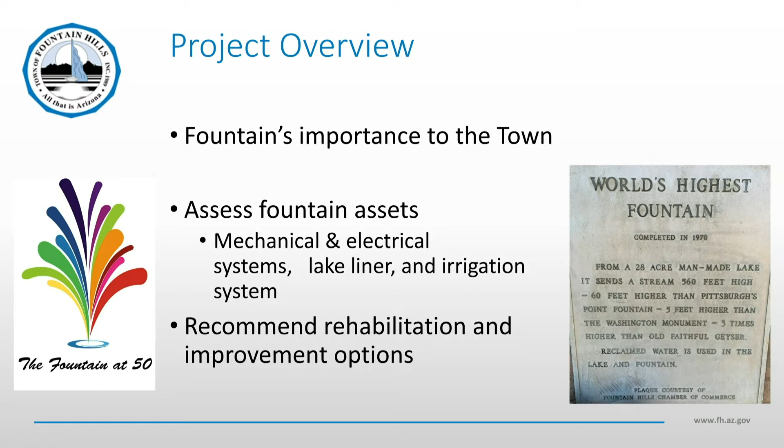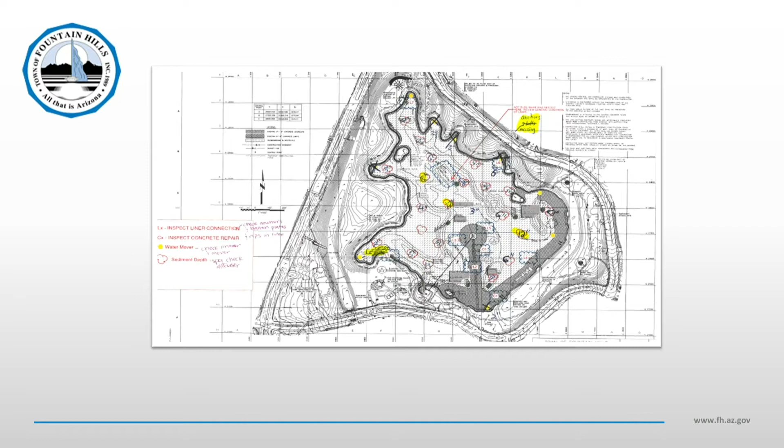So with that overview, we'll go through just some of the components. We'll see some pictures of what we looked at, and then we'll go into a little bit more about the scoring criteria. So certainly you typically don't see a picture like this. This is below the water surface. There's a lot of moving parts and some non-moving parts as well, but ultimately that mechanical equipment to aerate the water so it doesn't go septic, and to move sludge around so that it's not piled up in big areas.

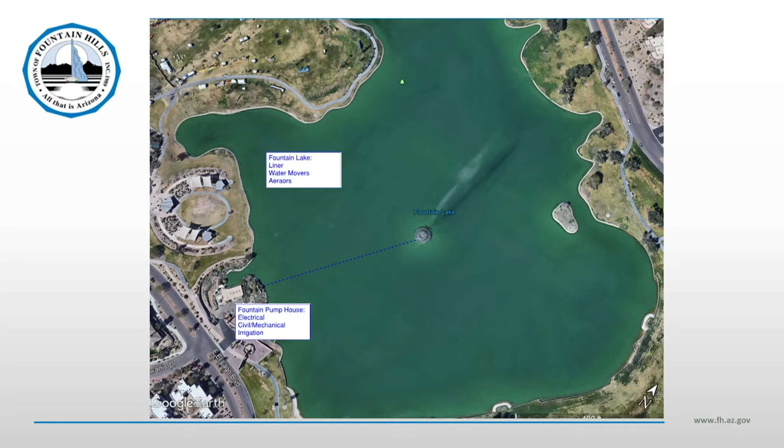Ultimately, there's the liner itself, and then in the pump station, the mechanical room, it's got the electrical equipment, all of the pumps, which you see here. This is one of the 3 large vertical turbine pumps, and the picture to the left is the actual check valve that prevents water from coming back after the water is pumped out.

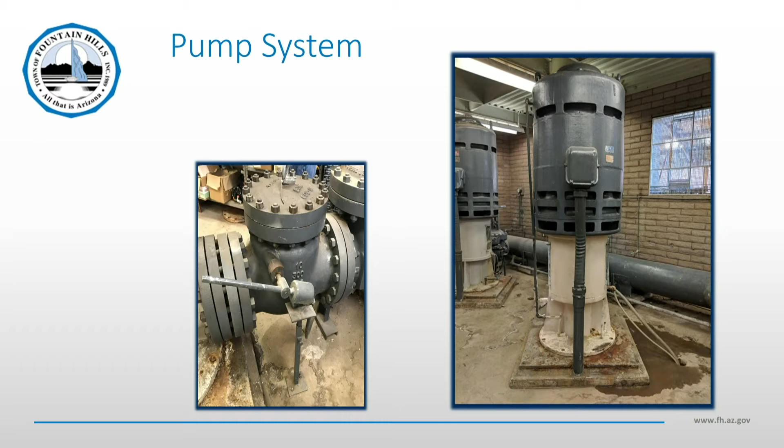The Lily structure itself is actually a lot larger than it looks since it's so far away. There's a nice platform that's out there as well. It's a concrete structure. We looked at the concrete itself; the nozzle itself you can see in the middle of the grating structure on the left. And I know there are some other projects that are ongoing to upgrade the lighting in that area, so we did not include that in our scope.

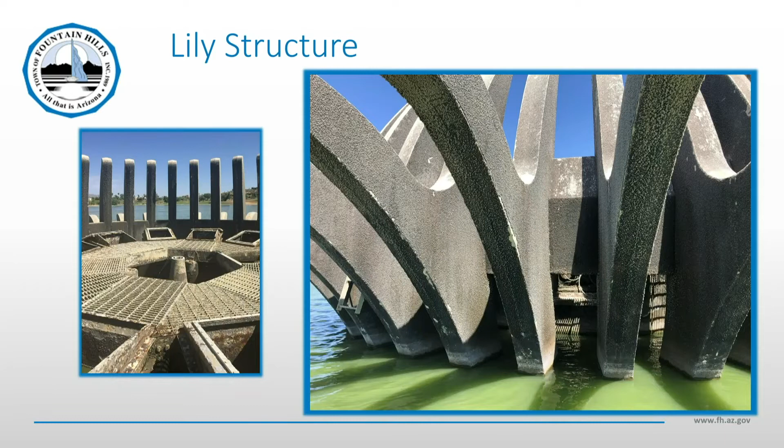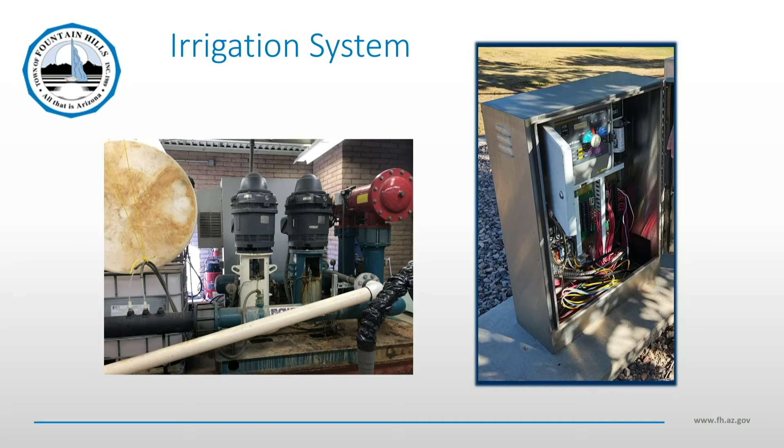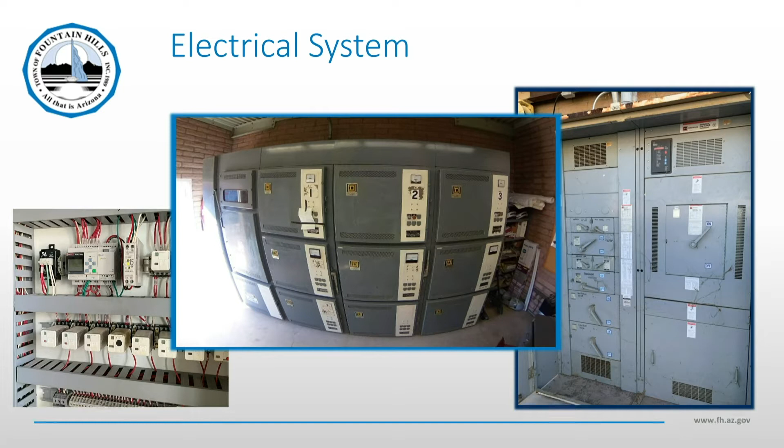That's done separately. The irrigation system itself: within that pump house room, there's a separate skid with the pumps that pull the water right out of the lake and send it to the irrigation system. The irrigation controller is pictured on the right. And then the electrical equipment as well. So there's main motor control in the center. The power that you get from the utility is fed through the one on the right. And then from an instrumentation and control, I&C standpoint, the control panel itself is the small inset picture on the left. So again, all of those things we'll talk through.

But one of the things that we wanted to talk with the team about was, how do you assess those different types of equipment? Those are all different things. How do you rate them? How do you rank them? How do you prioritize them? So what we did is we came up with some assessment criteria and associated weighting factors. And they fall into 2 categories. One is the likelihood that something might actually fail.

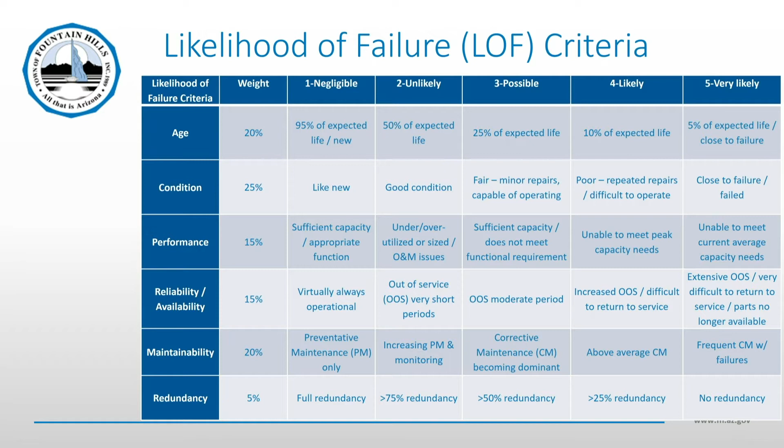So ultimately what we did is for every piece of equipment that we assessed, we used this criteria: how old it is in relation to, say, the manufacturer's typical recommendation for the life of that typical piece of equipment. And so just to give you a quick example, this likelihood of failure score, we took this particular pump. This was one of the irrigation pumps that is on the skid that's in the pump house.

You can see just physically from the picture itself, it's seen better days, right? And in talking to Kevin, that had already been on the list to be replaced. And since we've done this, it has been replaced. So that was already on the list. But this was kind of a snapshot in time. So we could see that we gave it, from an age perspective, a score of 4. So it's more likely to fail than not likely.

It's a fair condition. You can see just from the picture itself, it's not in the best of shape. There is some rusting, but it's not completely gone away, right? It's still usable. Its performance hasn't been able to meet what it was designed to do. And then the reliability and the maintainability both were scores of 3, right in the middle.

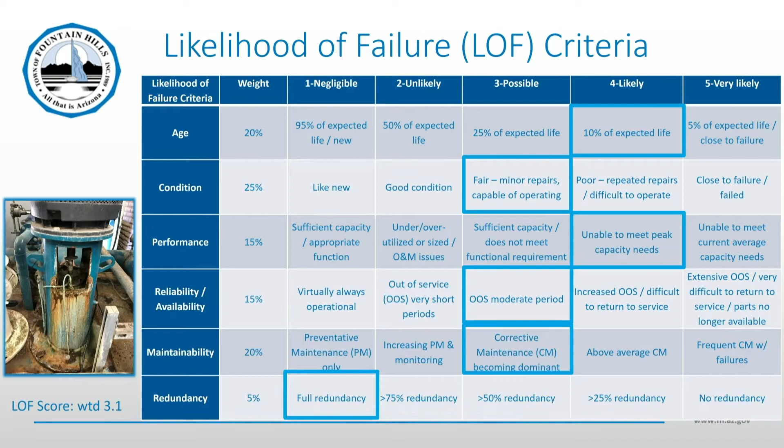But because there is another pump that's there that is fully redundant, it actually had a negligible score from that standpoint. So if you take all of those things and multiply them all together, you get a likelihood of failure score of just over 3.1. And the other criteria that we weighted against is what's the consequence of it failing? So it's not just, is it going to fail, but what happens if it does? So again, similar type of thing, we identified these.

Yes, please. Sorry. Did you assess how long it might take before it fails? So to answer your question, council member, how long some of this equipment might take to fail, that's kind of baked into the scoring. So the higher it is on the scale, the more quickly it would actually fail.

I should say that this picture that we showed is probably the extreme example of something that was close to failure. Everything else that we saw out there, while its age might be beyond the manufacturer's recommendation for a typical piece of equipment, there was nothing that showed imminent failure, if that makes sense. So from that standpoint, we didn't necessarily pinpoint this has 2.6 years until failure. That was my next question. Okay.

Sure. So from a consequence of failure standpoint, again, we came up with these 5 major categories. What's the impact to the environment? Safety and security, both for town personnel as well as the public. What's its impact financially? Does it have any regulatory compliance impact? And the biggest weighting factor that you'll see there is what's the impact to society or to your community? And again, 1 being the best score, 5 being the lowest.

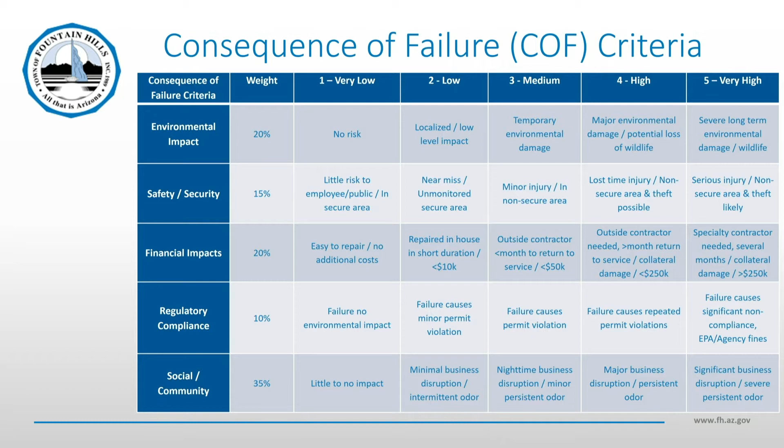And again, looking at that pump in particular, it had a medium impact from an environmental standpoint, so it was given a 3. From a risk of safety to the public, it was given a low risk, so it was a 1. Its financial impact, yes, there is some impact. It might require an outside contractor to help replace that, or is it less than a $50,000 cost? And then from a regulatory compliance, if that pump failed, you still have another redundant pump, and it wouldn't impact the environment if it did.

And then ultimately, though, it did have a higher score of 4 from an impact to society. So if there were multiple failures and it wasn't able to deliver water to the irrigation system and to the turf, then ultimately that would have a negative impact to the community.

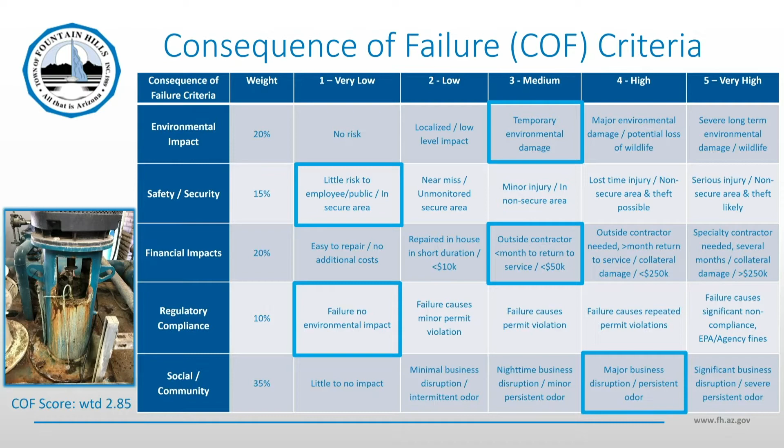Mayor. I have a question. Oops, sorry, go ahead. Yes, please. I was going to ask you, the weighting, the social community weight is higher than the safety security. Is that because safety security is going to get the attention anyway, or how did that weighting get figured out? Good question, Mayor. What we felt was most of the equipment is either submerged in the lake or behind a secure environment. So from that standpoint and talking to the team, more importance was placed on the impact to the general public.

Thanks, because it's more controlled. I mean, who's going in, they can evaluate what they're doing, rather than if it was out in the public somewhere. That's correct. Thank you. Councilman?

If equipment has, you think, a 2-year life, let's say, did you look at all at whether or not you can repair them rather than replace them? Yes, we did. You'll see in some of the later slides, from a recommendation standpoint, if it had the ability to be refurbished, that was the recommendation. If it was beyond or nearing the end of its life, then replacement, if that made more sense. And we have a couple examples of that.

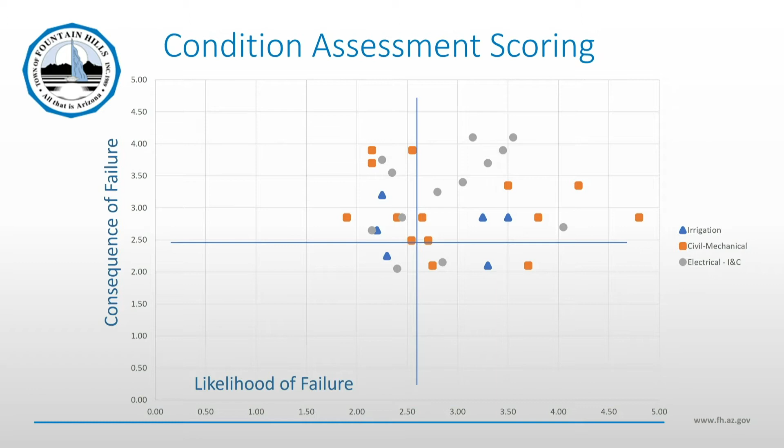So with that, are there any questions? I know this is charts and graphs and lots of things, but any specific questions about those? So each one of those represents a specific thing that you have in your report? Correct. Each one is a specific piece of equipment. So we'll talk a little bit more about specifics, not every single one, because there's a lot of dots up there, but we'll talk first about the civil mechanical system. I'll turn that over to my colleague, John.

Thank you, Mike. John Corbin with Black & Veatch. I was assisting Mike in the role of engineering manager. Very pleased to be here and not stuck in my office as usual.

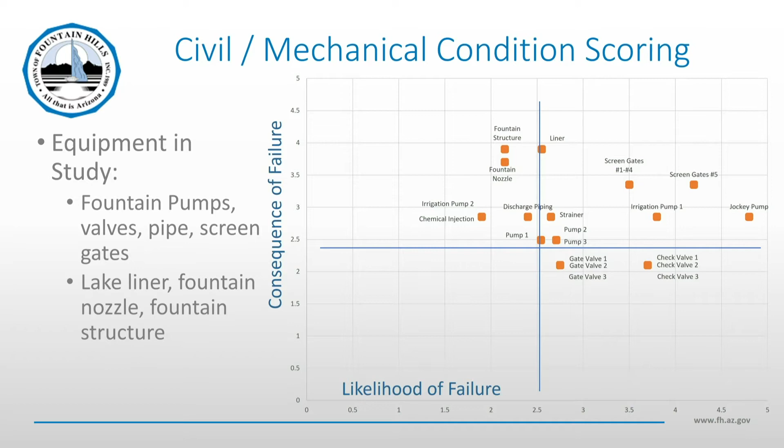So as Mike was relaying, we want to start by talking about the nuts and bolts, mechanical stuff. That's my area of expertise. As he went through in the introductory slides, we took a look at all of the equipment at the pump house and the major components there. We took a look at the lake liner and the fountain lily structure, and even the pipeline between the pump house and the fountain. We're not going to get into the nitty-gritty of every component, but we'll touch on the major assets here.

So let's start with the lake liner, because I think that's of greatest interest to many folks. As Mike mentioned, we sent divers down to take a visual, firsthand inspection of the HDPE plastic liner that was installed 20 years ago. We also had them look at where the liner meets the concrete that surrounds the lake, represented by this photo here. This is back in 2000 when we installed the liner. And furthermore, we had them take a look at the subsurface intake to the pumps at the pump house.

So let's talk a little bit about what's going on here. The liner is a plastic HDPE liner, and it's fastened to the concrete with stainless steel batten bars and these anchors. And we identified for the divers certain locations around the lake that we wanted them to examine the connection. And the feedback we got was all of the connections were in very good condition.

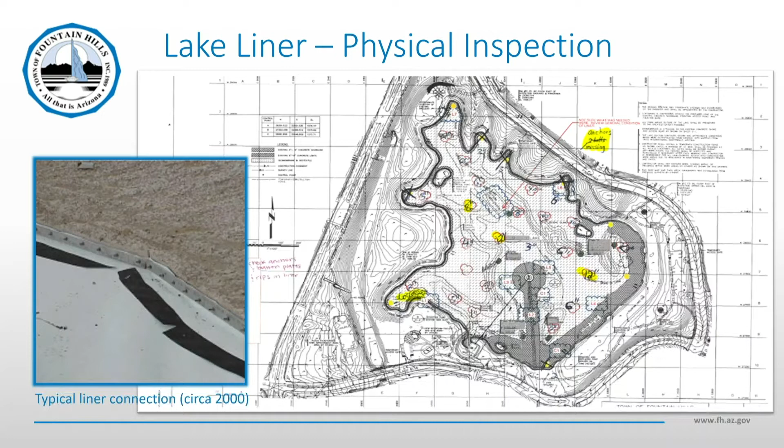And that goes for the liner condition itself. So they went out to the middle of the lake at certain spots that we identified and took a look at the liner condition. There were no tears that they observed. There's no folds, creases. Overall, very positive view of the condition.

But we'd always planned to go a step further and do an evaporation test on the lake as a whole, because we can't expect the divers to inspect every single square foot of that liner. It would be very easy to miss some damage. But by doing this evaporation test, we measure the loss of the lake over a period of time and compare it with the loss of a controlled evaporation pan. And there's a little bit of a conversion factor in there because you got a small body of water next to a large body of water, and they're not one-to-one, but there are accepted practices for doing that.

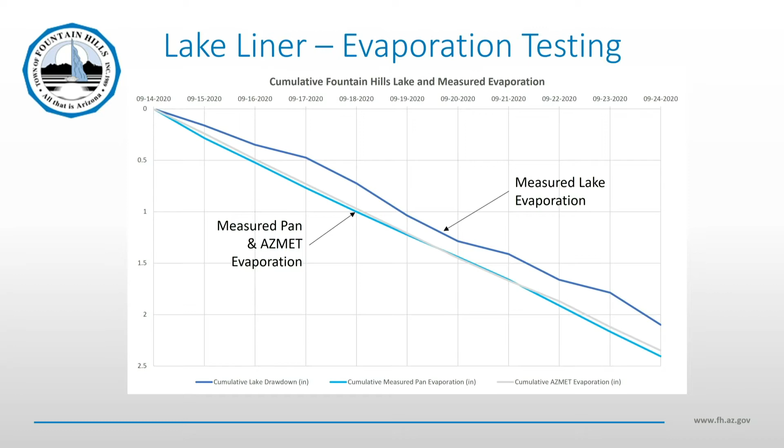How much, in gallons, would there be? Do you know? Over the course of the test period, how many gallons did we lose? I do not know that off the top of my head, and I can't compute that off the top of my head. Just curious. Sanitary district probably knows. Oh, yeah, but no, she was asking gallons. I don't know how many gallons. Per inch. Yeah. Come on. Thank you. No problem.

So as I mentioned, we also sent the divers over to the intakes that are beneath the pump house. And we had already known that there was some concern about the screens. The area under the pump house should be screened off to keep large debris out of the pumps. But since one of the pumps had recently sucked up a large fish and had to be fully dismantled to remove those fish parts, we knew something was awry. And what they found was one of the 5 screens was completely bent back into the intake area. So effectively, there was no screening.

It's not difficult to understand. We would recommend that get repaired right away, and we're actually working with the divers right now to come up with an approach for that repair.

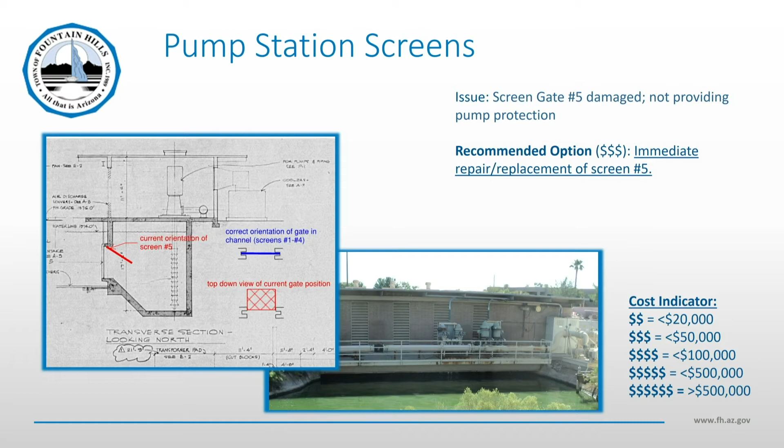So above waterline, we took a boat out to the lily structure. And yeah, the lily structure is covered with organic and inorganic material. It doesn't look pretty when you're up there close, but we could find no evidence of major structural faults with the concrete. There's some spalling in areas that I'm pretty certain were locations for the original anchor bolts when they hoisted that thing into place. But that's not a terrible concern of mine. Like Mike mentioned, the lighting was in poor shape, but we already knew that.

So our recommendation is just to continue to monitor and spot repair as needed. But furthermore, when it does come to a time in the future when the liner gets replaced, and that will happen someday, we would really recommend that an intensive cleaning of the structure would be warranted to get a more in-depth structural review of the concrete that right now is just kind of covered in muck.

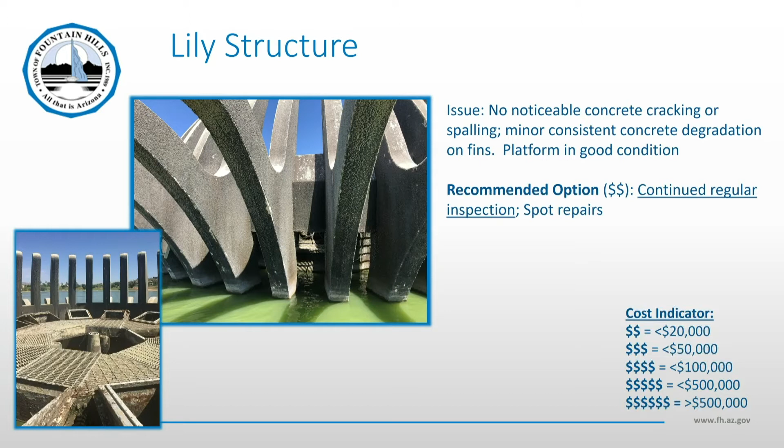Oh, here's those anchor bolt locations I was mentioning. So really, they're just tiny little divots in the concrete.

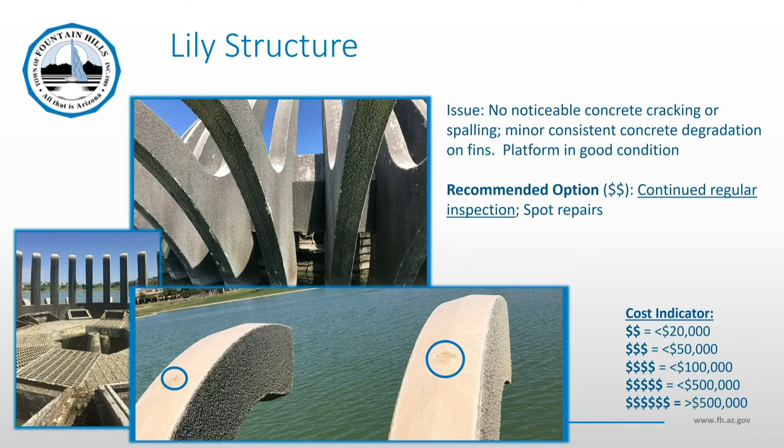So let's talk about another big one, the fountain pumps. When we initially entered the pump house to start our mechanical assessments, it was pretty apparent they needed some work. They needed some love and attention. But we weren't ready to say scrap them. We already knew that one of the pumps had been removed and was at a shop for rehabilitation. And that was great timing for us because then we could see the level of rehabilitation that was being done.

We went to the shop and talked with that shop to discuss what are you doing to the pumps, how are you doing it? And we were very pleased. You can see here, yeah, it's pretty looking, but more than that, this rehabbed pump has, to our satisfaction, been rehabilitated to the level it needs to be.

So we're comfortable with a recommendation of continue this same course of maintenance, and we don't feel that these just need to be scrapped and replaced anytime soon. You should get more years of life out of them with what you're doing. Yes.

Yeah, if you did total replacement. We rebuilt the motor when we did. Well, it's less than a half, but greater than 100. Oh, okay. Yeah, for all three. For all three? Right, okay. For all three, not each. Okay, thank you.

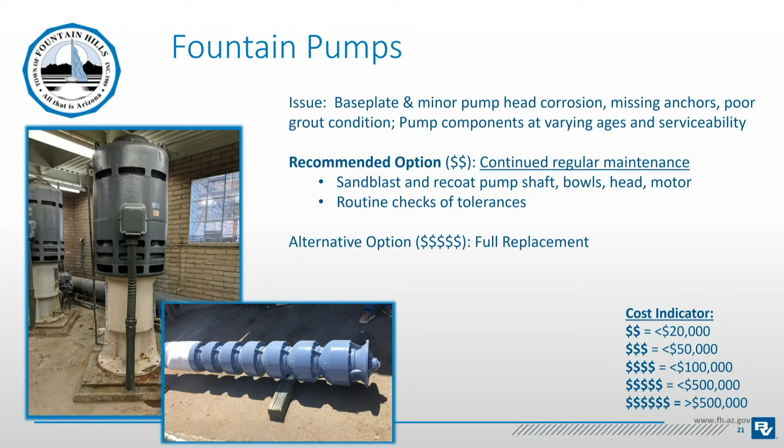So here is another sore spot that some of you may have been hearing things about. The check valves on the discharge of these pumps are there to protect the pump. If you have pump 1 offline and pumps 2 or 3 are operating, you don't want water backflowing down your pump. That's really their main purpose. Other than just a simple replace it recommendation, we wanted to understand why are these check valves failing after only 3 years? Because I know that's been a question on everybody's mind.

So we were able to actually open one up and take a look at the guts. We observed material loss, both in the closed direction and the open direction. So there's a lot of banging going on inside of there. And the progressive material loss is why it will stick open. And this has been a real headache for the operations staff.

Unfortunately, with the system, if one of these sticks open, the position switch on the exterior of the valve will fail to close. And what it does is just shut the entire pump station down. So instead of just affecting the one pump and the one valve, now your fountain's not running at all until Kevin goes out and basically jiggles the handle, just like you do on your toilet at home, to get it to seat. And it's not convenient, as you might expect. So, yeah, that's right, the jiggle the handle job.

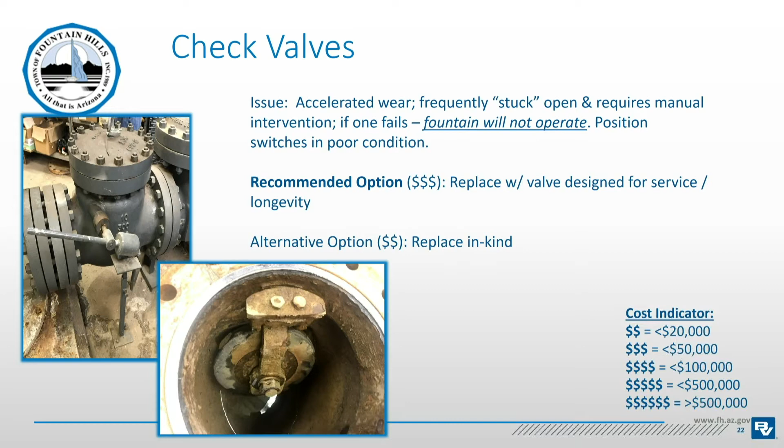So that's why we're stepping back and saying, you really need a valve that's had some thought put into it. And this is going to be more than your commodity off-the-shelf check valve that you could use in a lower pressure environment. It's going to have a little bit of a cost impact because it's going to be a higher pressure-rated valve.

Thank you, Mayor. So 3 years ago, Kevin or Rachel, when we replaced that, who told us to put that valve in there, and why are they not responsible for giving us bad information? Well, sorry, John. We may be stepping over, this is our next item, but to clarify, it was 5 to 6 years ago. They started about 3 years ago. We were replacing them, we didn't do them all at one time. We did them individually, one after another in successive years, because we couldn't absorb the cost.

My guess is, and I wasn't in the director role at the time when this started, but my best guess is that we worked with our vendor, an electrical vendor that works on our pumps and our systems regularly. We said, hey, we're having issues with our previous valves, which is the one up there on the left. It's sticking all the time, we're using a lot of clean water, we're having multiple problems, we need to replace it. They said, okay, we think this is the best situation.

We did not have an engineer involved at that point. My best guess would be that we went with the recommendation of the service provider, and there was a disconnect as to exactly how much pressure and how much volume moves through those pumps. So that would be my best guess. So we asked an electrician a plumbing problem question. Maybe. Good way to put it.

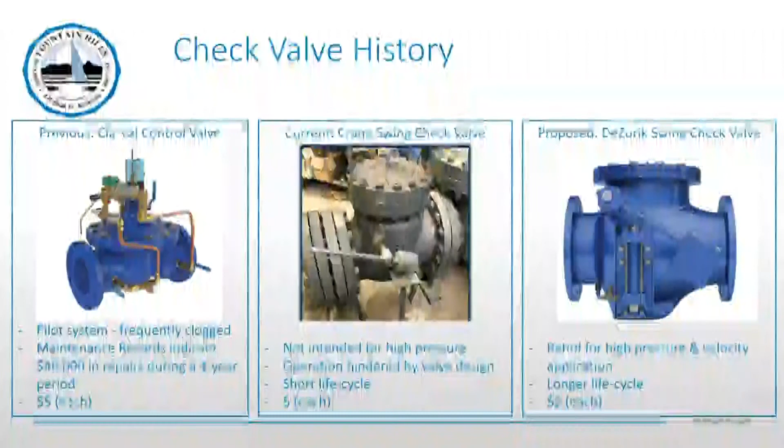So I think you stole my thunder on this slide, but I'll go through it anyway. As we were talking about, this was the previous style valve, generally just called a diaphragm control valve. Cla-Val is a brand, but this style of valve can be had from other suppliers. It's frequently used by municipal water suppliers to control pressure in their distribution systems, and it can be used on the discharge of a pump for pressure control. But what's key is that it have a clear water supply.

You can see from the little picture, you've got a lot of little tubes and appurtenances stuck on top of this thing. It doesn't do well with dirty water. But it sounded as if when these were installed, they did have a separate clear water supply. Regardless, it sounded to be a maintenance issue, repeated clogging issues. It wasn't a good fit. And frankly, if we were starting with a blank page design, this kind of valve we would never be suggesting. So it's curious that it was used, but we wanted to dispel any thoughts that it worked really well, so why don't we go back to it?

Mayor? Excuse me, I'm sorry. Yes. We have a lot of salt in the water. How might that affect any of this equipment? You know, these are lined appropriately, coated.

So let's jump from what was to what is right now. It was replaced with a swing check valve, and like I had mentioned, that doesn't necessarily mean all swing check valves are a terrible application for this. It just happened to be that this really wasn't rated for the job. So what we're proposing looks an awful lot like what you've got, but all the internals are rated for a 300 PSI operating condition. And we're going so far as to also suggest things like an integrated damper.

So think of it kind of like the shocks on your car. It kind of helps to control movement. This would help to control violent swings internally that could damage the inside of the valve. And this is integral to the valve. Also, we'd be providing a position switch that was integral to the valve. If you take a look at what has been done here on the existing valves, the position switch was kind of an afterthought, and it hasn't worked terribly well. It's just kind of sitting there on a little post. So we would move away from that kind of an installation.

So, to kind of reiterate what you had just mentioned, yes, there might be a little bit of economic impact, some soreness there, but you're going to get a heck of a lot longer run out of this, and it's the right application.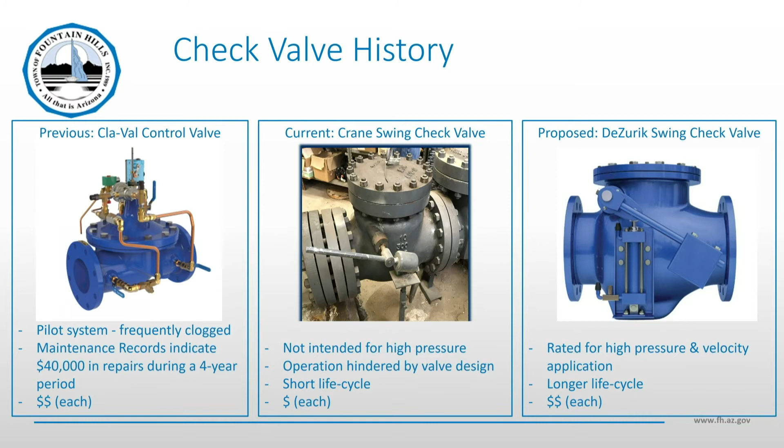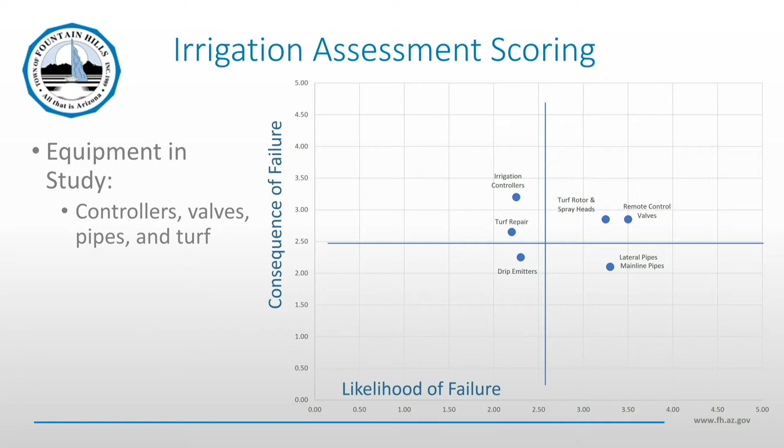So I will just do my best to give you the overview of the irrigation system that J2 assessed. When I take a look at this graphical summary of the assessment, each individual item may look like, well, gee, most of it's in fairly decent shape. But I think what we want to do is bring your attention to the system as a whole that needs to be evaluated maybe in a little different vein from just looking at the piece parts here.

So we've been told that one of the biggest sources of complaints that we're going to get is from the public perception of the turf quality and the irrigation. Morning and afternoon walkers around the lake don't want to be hit with irrigation spray, and they're going to say, why can't you do this some other time? And if there's rough spots, they're going to complain about that too. So irrigation becomes kind of a higher priority item than you would think. And that was kind of covered in our consequence of failure discussion earlier. Did you have a question?

I do. Back to the salt. Yes. The salt is just ruining all the grass. Is there anything mechanical that can be done to reduce it? Well, Kevin's done a great job in honing in on chemical treatment, and that is going to be your best option because mechanically, well, how do we remove the salt in our homes? By an RO system. And what we do in our homes is we actually take that concentrated salt and flush it down the drain. On a large scale like this for the lake, what are you going to do with that salt is a big problem.

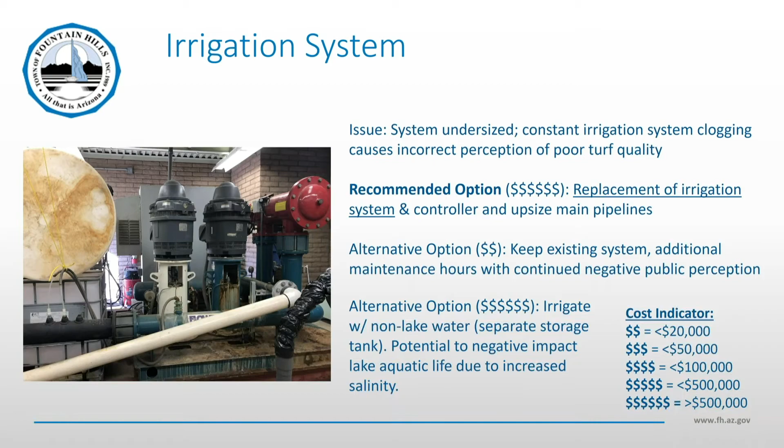And this is all in conjunction with the fact that it's become a maintenance nightmare because they're regularly out there cleaning irrigation heads because they're clogging. I think the system's so old that it's got a whole lot of material buildup inside. Stuff that they're not necessarily seeing at the pump house, but they know ends up reducing the range that their sprinkler systems will shoot, because things are clogging up. So there's a lot of those factors to consider.

And so as a whole, our recommendation is a pretty sizable upgrade to the irrigation system. Controllers to better offer more flexibility, main size increases, and pump size increases. Now, the good news is, of course, you don't have to spend all of that money in one fiscal year. You can have a replacement budget on an annual basis, but one thing to note with that approach would be you may not be getting all the benefit that you're looking for when you piecemeal it out until everything's in place.

I have a question about the option about using the non-lake water. Yes. That wouldn't solve this issue necessarily, right? Yeah, unfortunately, it creates other issues, I should say. So yeah, I wanted to briefly touch on that. So we had talked with the sanitary district about this idea of, let's look at taking water directly from your AWT site, your advanced water treatment facility that's just down the street. And don't put that water in the lake, but rather direct feed it to your irrigation pump system. And that would solve a lot of your irrigation quality problems.

And we looked at multiple things associated with it, not only the capital associated with purchasing new VFDs and installing them, which kind of has a domino effect on some of the existing electrical equipment that's there, but also on just the timing of when a variable frequency drive would be used by these pumps. So typically, right now, if the wind was nice and calm, the pumps would turn on and even if they had a VFD, they would ramp up to 100% speed and they would stay there for the time that they were on and they would just turn off.

The only time that a variable frequency drive would be desired would be to try to match the speed of the pump to the wind speed of the actual environment to prevent drift of the fountain. So when you consider that these pumps run 3 hours a day total, and that most of the time they're operating at 100% speed anyway, whether it's one pump or two pumps, depending on the wind speed, and then you throw in the fact that they're pretty intensive capital-wise to install.

The equipment where you would need to put them inside, because they need to be installed inside, you'd have to take the existing electrical equipment and buy a new one and put it outside, and then do all the cable and conduits, and then upgrade the HVAC system in the room, because there's additional heat that's generated by those. So there's just a lot of extra things. And when you do the payback period on that, it just doesn't pencil out. So we don't recommend putting in VFDs on these pumps.

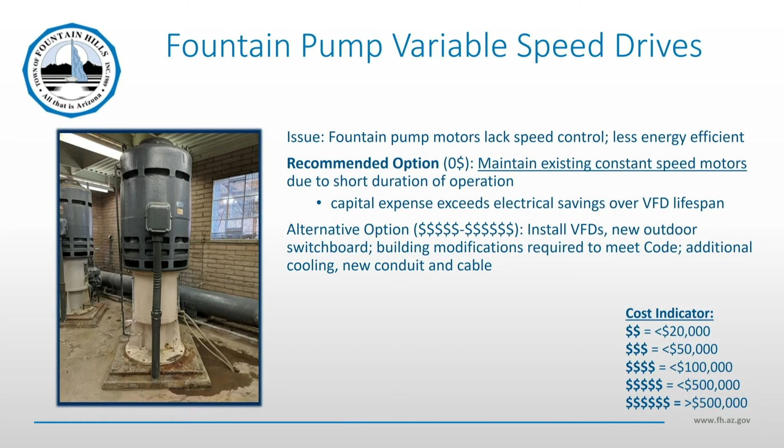And if for whatever reason you did change the duration that those pumps run, then that might be something to look at again. But even then, I still think it would be difficult to get that payback period just for the typical lifespan of a VFD themselves. So with that, that's a zero cost option that is nice. So I think a more economical way of being able to help from a control standpoint would be to look at how the control system of the fountain system is being done right now. And you see that inside this control panel is just a little controller there, and it's pretty basic.

It works, it runs, but it doesn't really communicate to the outside world. So in order for Kevin and his team to understand what's happening, you have to physically go over there to see what the problem is.

So our recommendation would be to spend some money to replace this basic system with a programmable logic controller, a PLC, which would be able to provide Kevin and his team, from an operations standpoint, real-time information about the status of the pumps when they're operating, the status of the check valves when that switch has been made or not made.

And if you also add a cellular link to provide that information, similar to the cellular link that you already have out at the, I think there's a restroom and office building or structure that you have in the park. It's a similar type of thing. It would just be a second one that would be added.

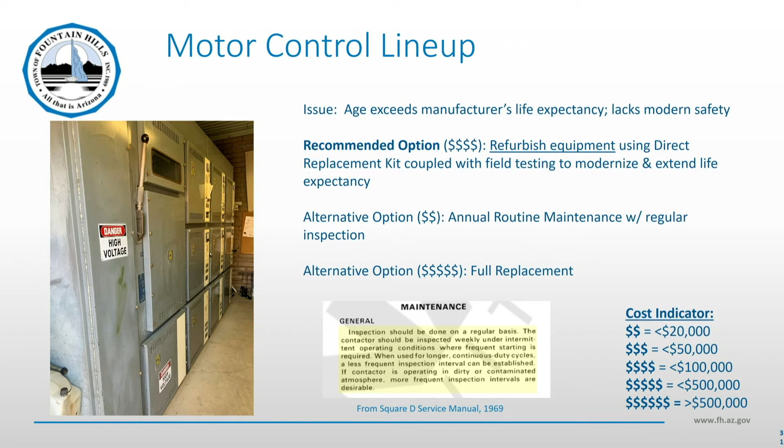So would that be part of the recommendation on this next page then, or is that in addition to? The recommendation for the refurbishment of the equipment is separate from this. We've already done the assessment. All we need to do now is just print the labels and put them on the equipment so you know what's there. If other equipment is replaced over the course of time, like a transformer or one of the other pieces of gear that's out there, you would need to revisit this analysis and put a new sticker on it based on what was actually installed.

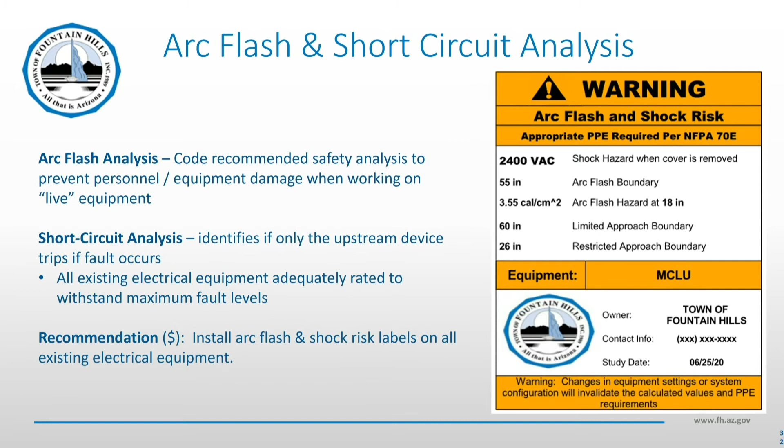The only other thing that I'd mention on this slide in particular is the short circuit analysis. So just like if you plug too many things into your outlet, you want the fuse to trip in the fuse box, not the entire fuse box in your whole house. So what we found was that all of the electrical equipment that you have installed right now is adequately rated so that if an individual piece of equipment trips, the next piece of equipment that's supplying the energy will do its job and fault first without making the entire station go dark. So that's the main summary of that.

So those were the things that we did want to highlight. Again, there were a lot of other pieces of equipment that we did assess. We can talk about those or any of the other ones that you'd like to, but I'll just do a quick conclusion. Again, in general, there's a lot of equipment out there that has reached the published manufacturer's recommendation for its life.

But again, the job that Kevin and his team have done to keep that equipment in good working condition and continue to do the recommended maintenance has been good to the point where there's very little in immediate need of replacement. But as you said, Councilman, you would need to start doing that planning because there are some fairly large expenditures to be able to replace that equipment when you want to replace it, not when it decides to replace itself.

Some of those immediate recommendations, we kind of already talked about those, the check valves. There are 5 intake screens on the inlet of the pump station that's in the water. The one that's damaged, we would certainly recommend that be repaired and replaced. We'll finish out the project right now and put the arc flash labels on the electrical equipment.

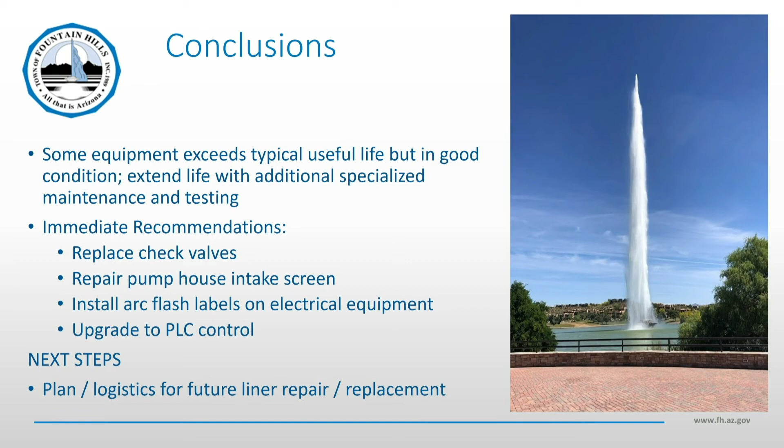And then again, instead of putting the variable frequency drives on the pumps, upgrade the control system to a PLC so that you can have that opportunity to, I mean, shoot, Kevin could probably control the pumps from his phone from somewhere else if we decided to program it that way, but also provide that interaction to the public if that was so desired. So those are those immediate recommendations.

And from a next steps standpoint for our study, as Grady mentioned, we're looking at the logistics of how do you replace that liner. The liner's in good condition now, but what happens when it does need to be replaced? You can do a periodic test of the evaporation, and if that starts to diverge or go the wrong direction and appears it may be leaking, then at that point, what do you do?

Certainly 20 years ago, there were a lot fewer residents, and how the 100 million gallons was disposed of is not necessarily the same option that's available now. So from that to any of the solids that are there and the aquatic life, all of those things are questions that we'll look at and come back and talk to you about at a later date.

As you might expect, the liner is our #1 concern. Correct. Because of the cost of removing the water and everything. You had divers go in, you said it's in pretty good condition. Give any idea as to how long you think it would last? Well, I think between the 20, 30-year mark is typical for that type of a liner. We're at that 20-year mark, so it's good that you have done that assessment.